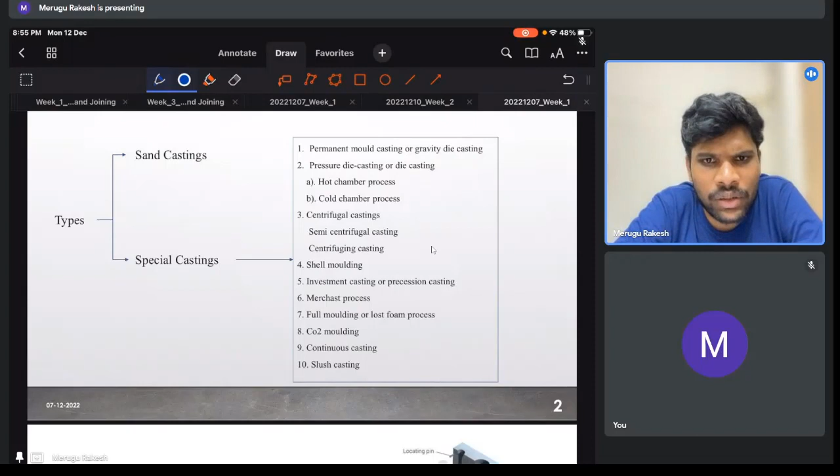Now let us discuss the different types of special castings. I have listed a number of special castings: permanent mold casting or gravity die casting, pressure die casting, centrifugal casting, shell molding, investment casting or precision casting, lost foam process or full mold process, Mercast process, CO2 molding, continuous casting, and slush casting. Let us discuss one by one.

The first one is the permanent mold casting, or the gravity die casting process. As you can see in the figure, we have molds which can be opened or closed using clamps made of metal, and you directly pour the metal, with the riser, runner, and the parting line. Once the metal is poured, we can separate the casting by removing the clamps and get the casting out, and we can repeat this process.

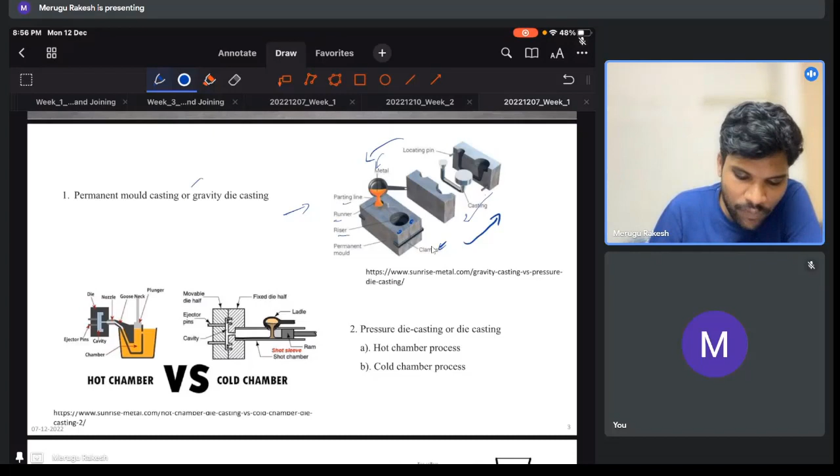This can be very fast production. This is simply gravity die casting, where we are not applying any pressure; we are directly pouring with the help of gravity.

When you come to pressure die casting, there is high pressure die casting as well, where we use a very high amount of pressure. Generally we use a plunger, and there are two types: hot and cold chamber. Generally you use a plunger or a ram to push and squeeze the metal into the cavity, as you can see here.

So these are two types: hot chamber and cold chamber. The distinction is that in hot chamber, the entire setup—the molten metal, the plunger, the nozzle, everything—is inside the hot metal. Whereas in cold chamber, we use a ladle to pour the metal into the cylinder, and we use a ram to push the liquid into the cavity.

So what's the main difference—why put it inside the hot chamber, why pour using a ladle? In hot chamber castings, the number of steps involved is very less, so the production is very fast. Whereas in cold chamber, the number of steps is increased, so the production rate compared to hot chamber is less. But there is a catch: in hot chamber, you cannot use metals with very high melting points.

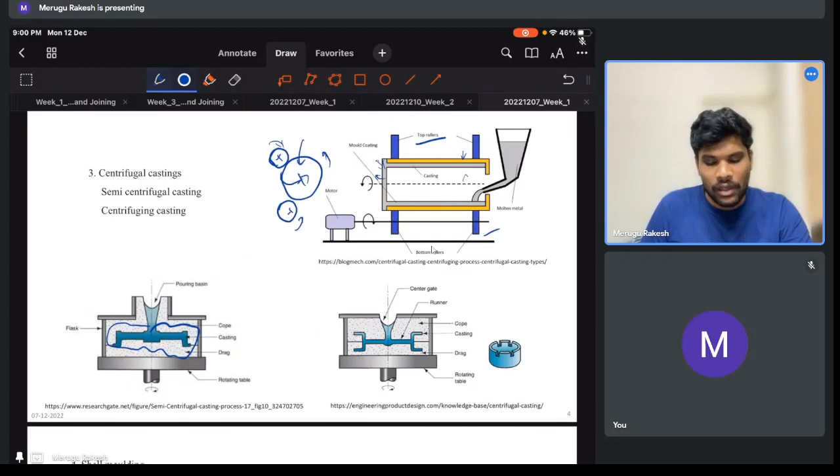Now there are some other types: semi-centrifugal casting and centrifuging casting. Both look similar, but in semi-centrifugal casting, this is the entire product we produce, say a wheel used for automotive applications. If you want to produce a wheel, you can directly make it using centrifugal casting, with just a pouring basin, a cope, a drag, and the cavity.

In centrifuging casting, we can produce several casting products at once using this setup. Here you see only two, but it can be any number. We have a central sprue and gates providing the liquid metal into the cavities. This covers centrifuging casting, one of several important types within centrifugal casting overall.

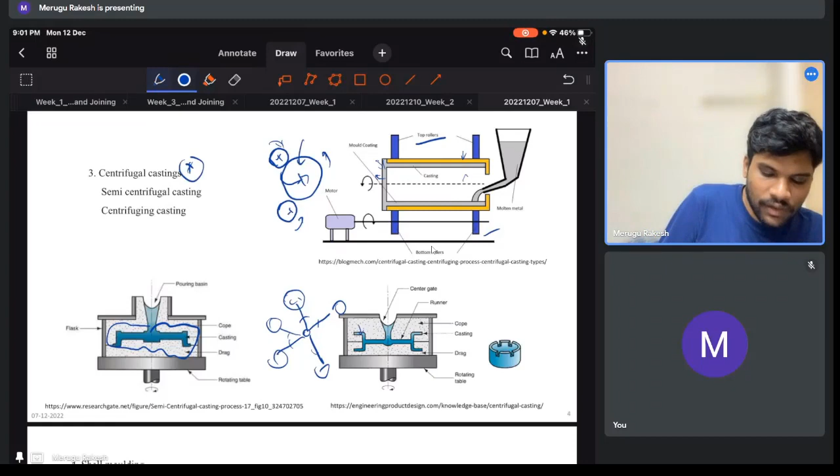Let us now discuss other types of casting. One is shell molding, where we use a shell to form the cavity. Initially we have sand mixed with some type of resin that hardens when exposed to a hot plate or similar heating.

Here we have a hot pattern where the design, the cavity, is already provided, and we invert the box. The sand in contact with the hot plate slowly hardens. When you reverse it, the thickness depends on the time and temperature parameters used. Then, using ejector pins, we eject the shell.

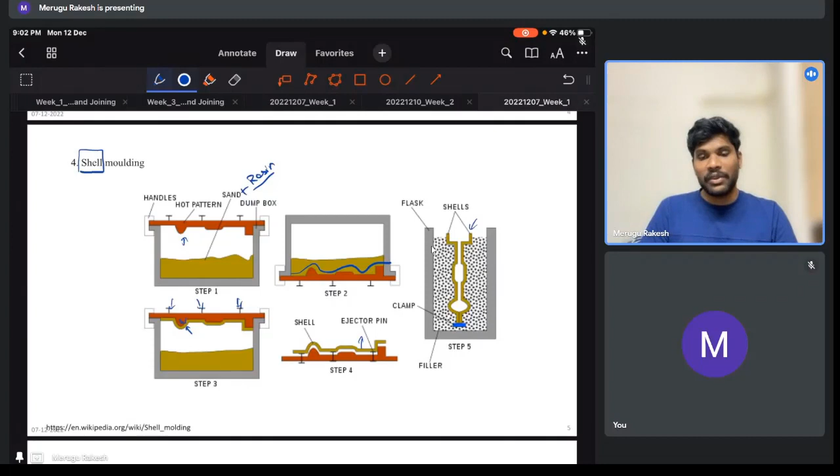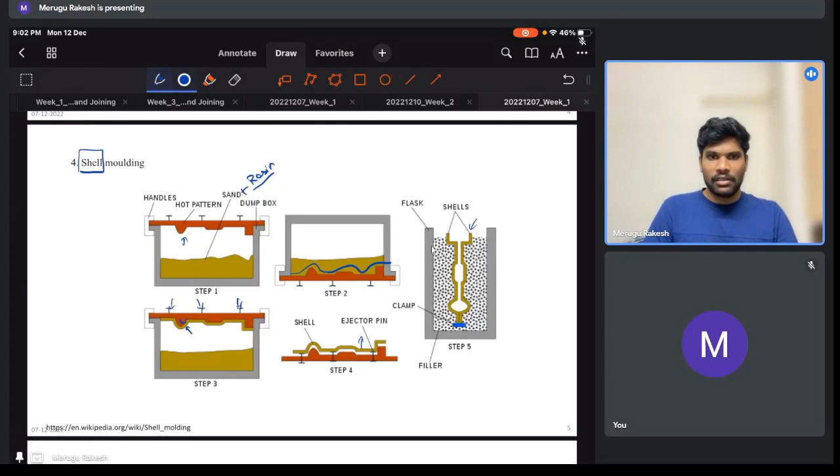When you combine the two shell halves, they form the final casting mold, and you can directly pour the metal inside. There's no need of patterning or ramming or anything else. We can directly get a product with good accuracy using a limited number of steps. After that, we take out the shells and repeat the process. This is shell molding, remember we are making the shells out of sand mixed with resin.

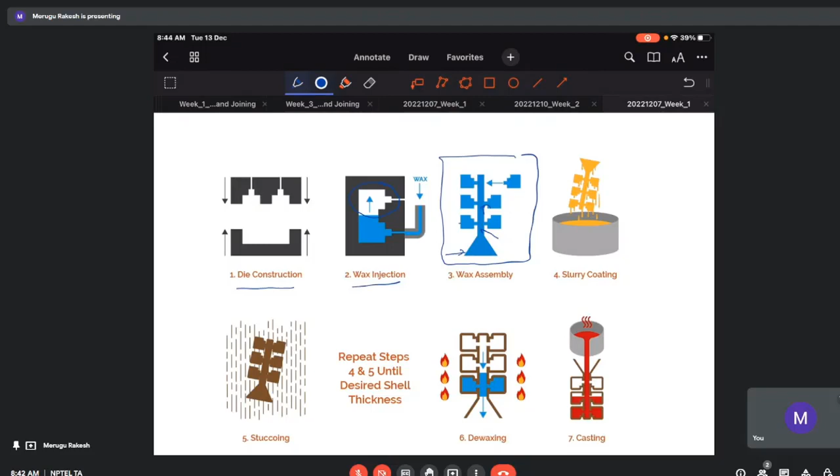Once everything is ready, we dip it in slurry coating, where it forms a thin layer of slurry. Then we repeat this stucco coating 4 to 5 times, where powder ceramic particles adhere to the slurry and form the desired thickness. As you can see in this picture, we have the desired thickness, which can hold the pressure and weight of the casting we pour in.

Before pouring the casting, we have to remove the wax inside it. It was taken into hot ovens and held for some time so that the wax is completely removed from the mold cavity.

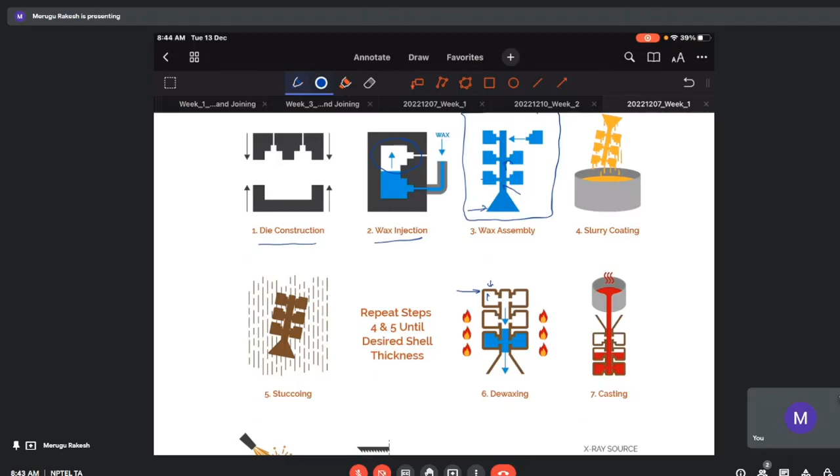Once it was dewaxed and dry enough, we pour the metal directly into the castings, followed by removal of the shell using sandblasting or jetting, then cutting the central sprue, runners and ingates. The parts are then machined and taken for inspection.

So this is the whole structure of investment casting, very important from an exam point of view. It is also called precision casting because the product we get compared to sand casting has very good dimensional accuracy. That's the reason we can get net shape products and large amounts of products at a time.

But the main disadvantage is that it has many steps to follow, as you can see the steps involved are very high. But it is also used for a lot of applications nowadays.

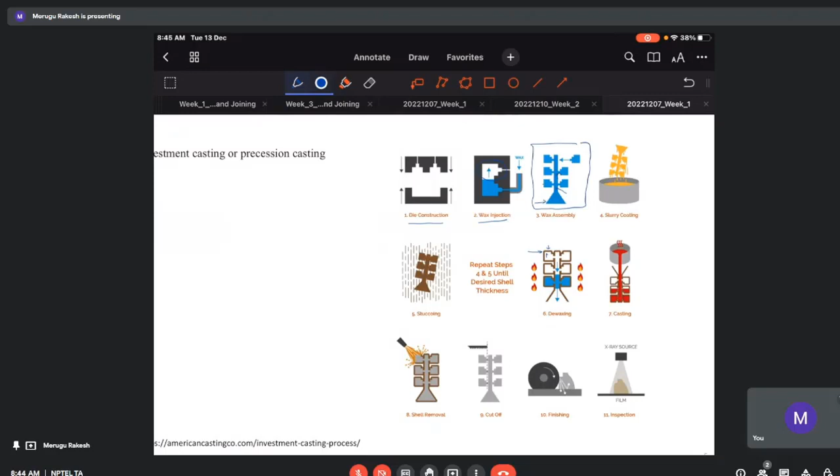Next, before going to lost foam casting, let us discuss the Mercast process. Mercast process is nothing but instead of wax, we use mercury, which gives even higher dimensional accuracy. The liquid mercury is cooled below room temperature so it becomes solid, then everything is repeated similarly, and finally it is heated up so that the mercury is removed from the pattern and mold cavity.

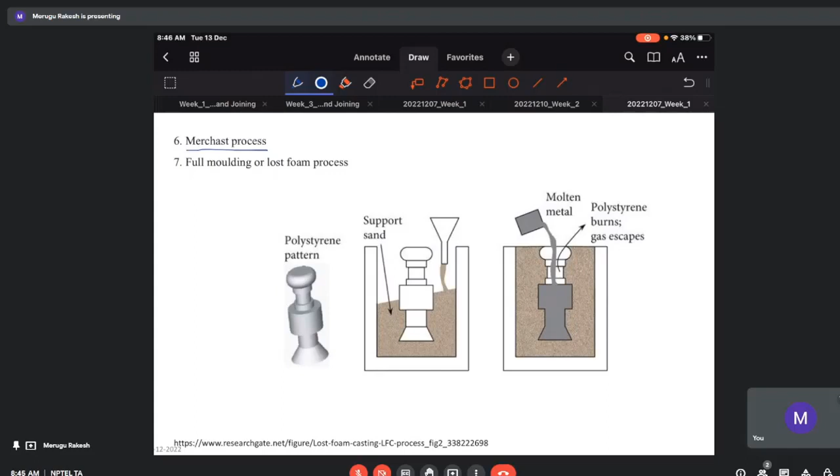Now let us discuss lost foam casting. Here the pattern itself is made of polystyrene, a plastic material, like thermocol sheets, as you can see.

Once the pattern is made into shape, it is inserted into the sand and it is filled completely. Then we will not remove the pattern. There is no requirement of two split patterns - only one pattern is used, and we do not remove it at all. We directly pour the metal inside, even with the pattern still inside. This pattern gets evaporated instantly when it comes in contact with the molten metal.

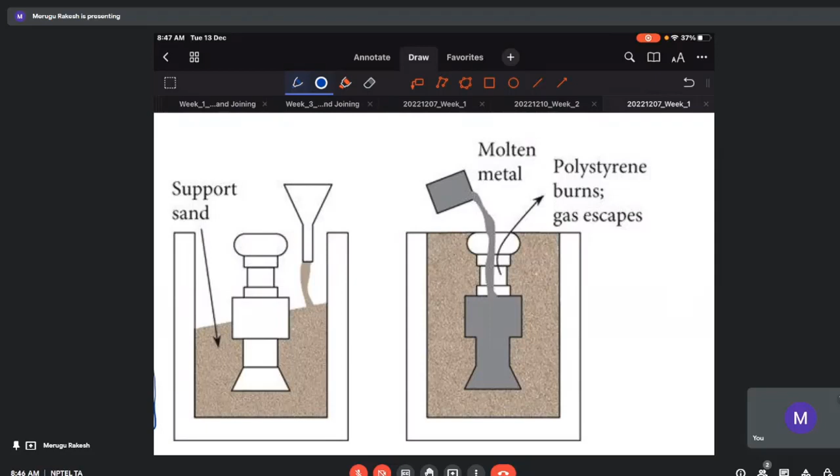Once everything is removed, this gives good quality castings with only minor defects. So this is lost foam casting, where the foam completely evaporates in this process.

Remember it. Now coming to the final three stages of these special types of castings. CO2 molding: we have clay mixed with some chemical like sodium silicate, and when CO2 gas is purged into this, it converts into silica gel, which is strong enough to bear the loads of the castings.

We have different types: using a single probe, using a multi-probe, and using a big duct kind of arrangement to make the pattern shape. This is called CO2 molding - the mold is mixed with some chemical and hardened using the CO2 gas.

If you have any doubts, it's very simple - you can easily get processing videos of these. Just have a look, it takes less than 2 minutes, and you can get a better understanding of these moldings.

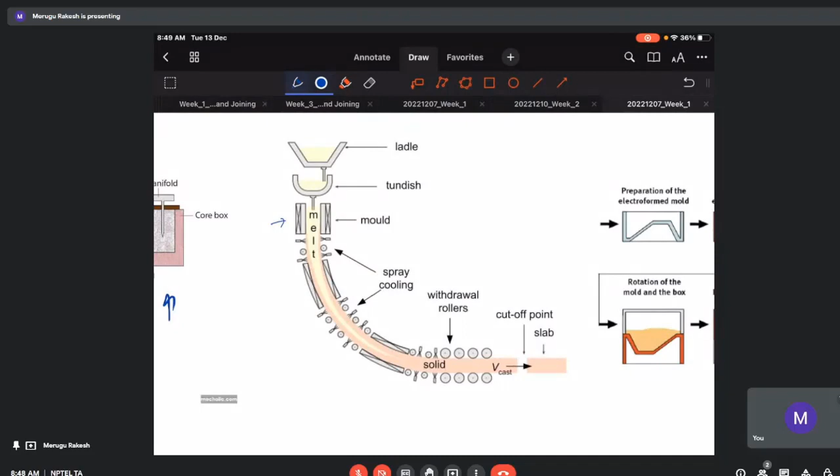During this whole entire process, the melt liquid will convert into solid. As you can see, the color difference. This is how we directly get the slabs. So this is a continuous casting used in very high processing plants.

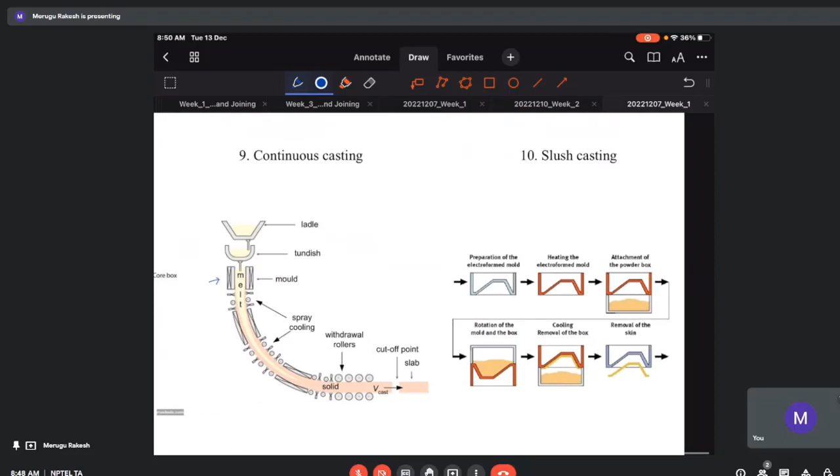So then comes the slush casting. This is more or less similar to shell molding. In this we pour the metal. Initially we have a mold which was heated, then it was added with the powder, and the rotation of the powder causes the sand in contact to get hardened, which is finally removed.

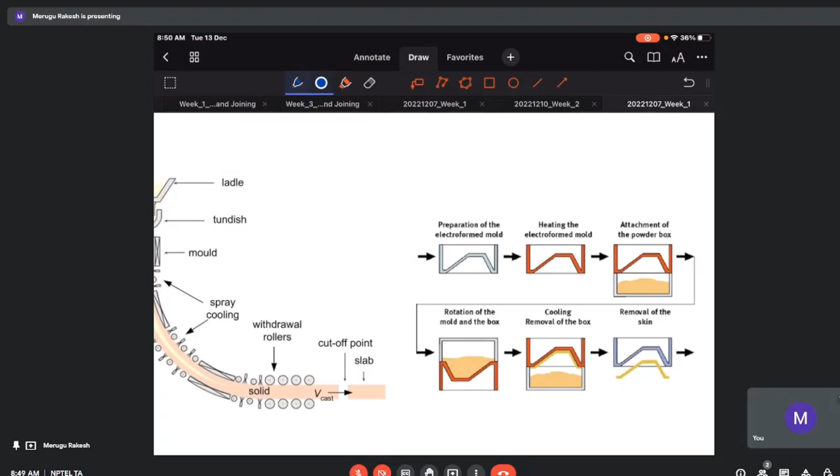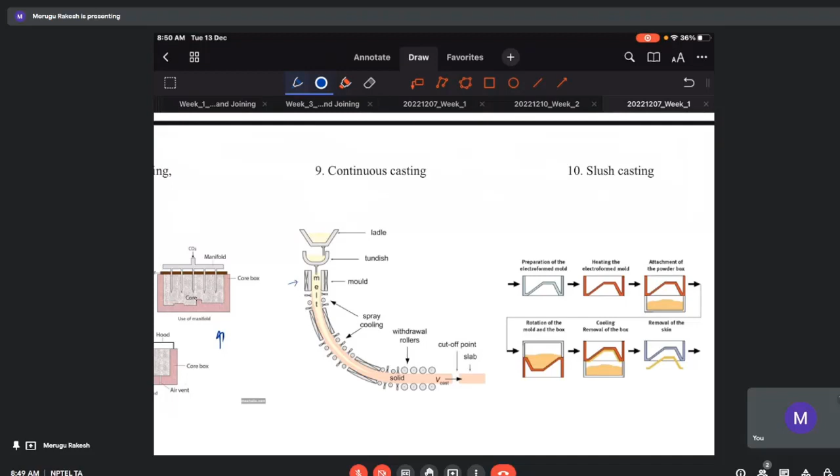Okay, this is the process of slush casting. This was used mainly for the hollow objects that we want to produce. So these are the main special types of castings that we generally use.

Remember, initially the metal is poured in a metallic die, and the die is tilted to drain off the excess metal. After the skin of the required thickness is obtained, the skin itself is the casting.

Okay, so you can assume, suppose if I want to cast, this is my mold. Then what I do, I'll pour the liquid metal. When it starts solidifying and forming some thickness, at that time I will invert this complete thing, so that when I invert it, the remaining liquid will fall off, and I will get this thickness.

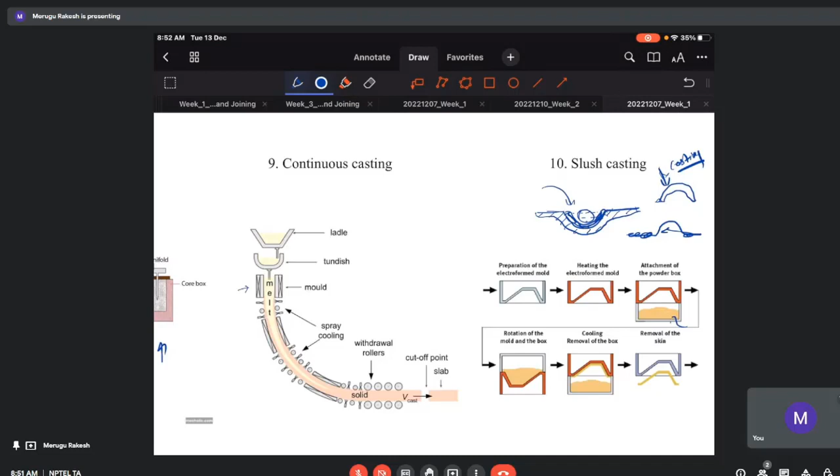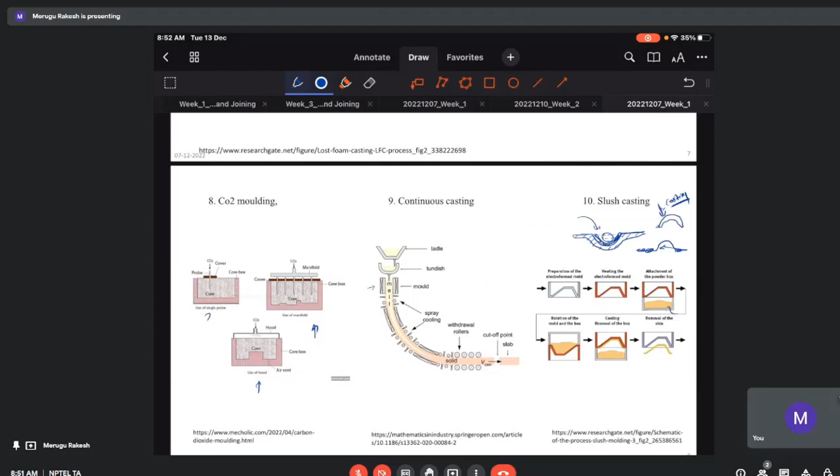As I said, in CO2 molding as well, the chemical used is sodium silicate as a binder agent. When this CO2 gas comes into contact with this thing, it will form a very hard mass, silica gel, which binds these sand grains together so that the mold is held together.

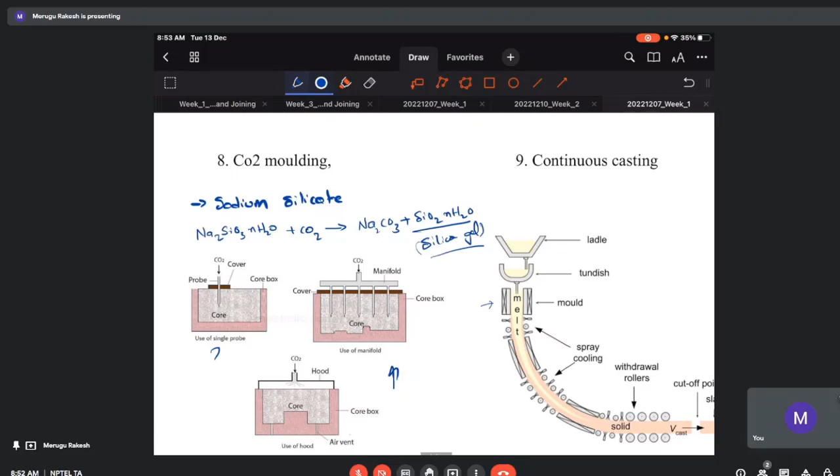So if you want to see this reaction: sodium silicate Na2SiO3, with water, when combined with CO2, we get sodium carbonate and the silica gel I'm talking about. That's the chemical, that's the whole thing about the CO2 gas.

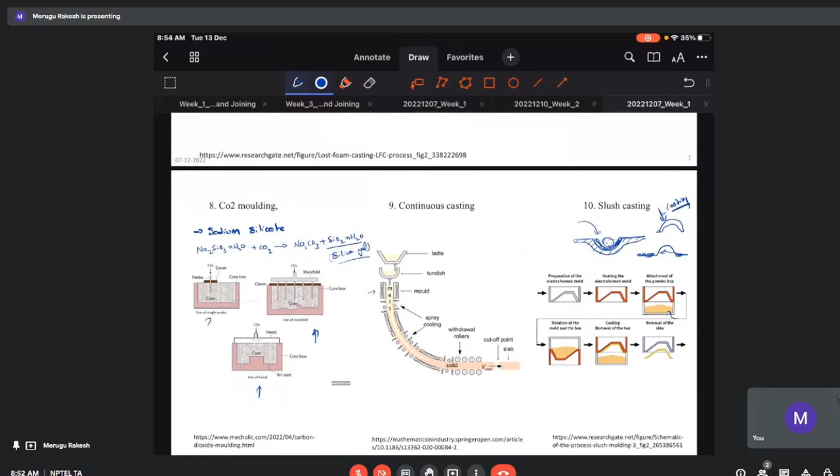This is the theory regarding different types of casting. You just have to remember the principle, simply how it works, and then you should remember the applications where we use it and why we use it. Here I discussed 10 different types of special castings generally used in these processing industries.

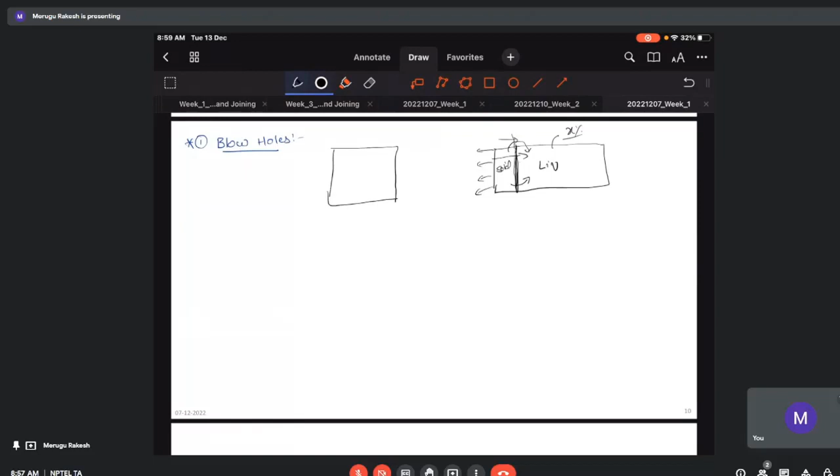Initially there will be some x% concentration in the whole liquid. When the solid front moves further, the solid will reject some gas, say hydrogen for example, into the liquid. So each time the liquid gas concentration will increase by some delta x amount.

When the solidification has moved sufficiently, this liquid will become very highly saturated with gases, so that it is able to form a gas drop, a gas bubble inside it.

If the permeability of the sand wall is good, this gas can escape easily. But if the permeability is not so good, these gases will be entrapped inside, and finally they get solidified and remain within the castings.

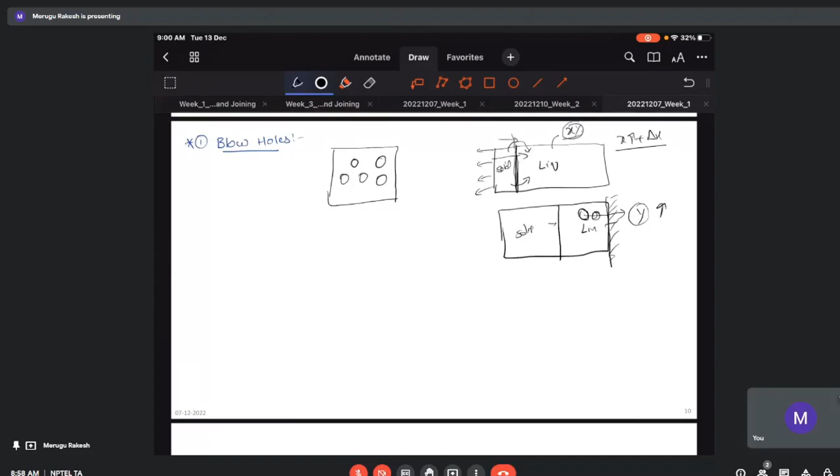That's the reason why these blowholes occur. So you have to remember the permeability of sand is also very important in this scenario.

Okay, so the second defect I want to talk about is this shrinkage cavity. This is something to do with the shrinkage of the metal when it solidifies from liquid state to solid state.

As seen earlier, this is the mold wall. So these are the mold walls where nucleation initially starts, and it gradually progresses.

The liquid at the center will still be hot, because solidification is starting from this direction and this direction. So finally the scenario will come like this.

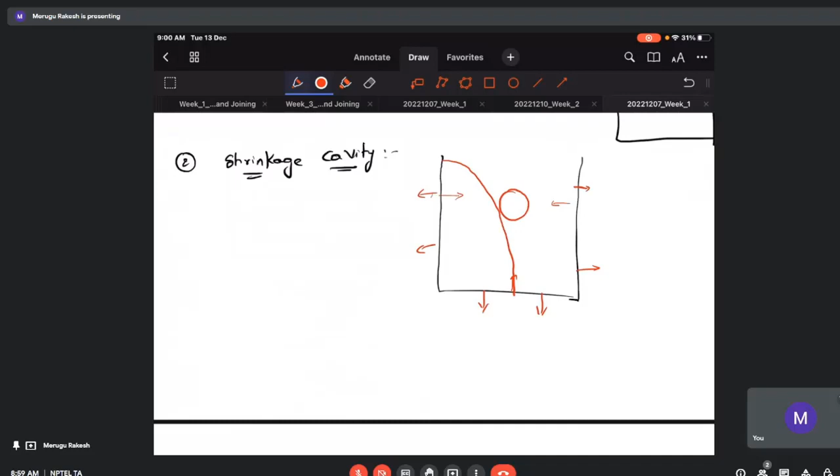Such that there is no liquid present at the center. Everything got taken away by the solidifying front, and at this position at the center we see absence of material, known as shrinkage cavities. This is the defect known as shrinkage cavity, and this can happen inside the metal also.

It is not only present at the center. It can also happen inside the casting due to the same effect.

But inside the casting, you can clearly see the distinction: gas porosity is more or less spherical, whereas shrinkage cavities are very rough, flat, rough cavities. This is due to improper gating and risering systems.

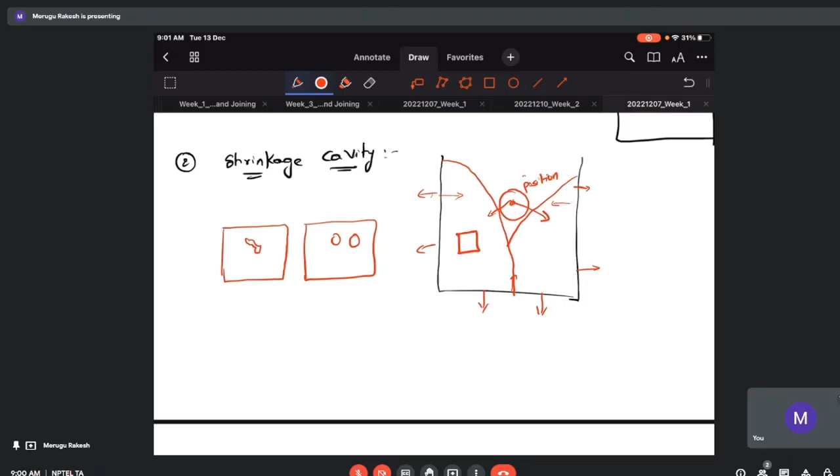You have to provide enough extra material using some riser, so that it compensates for this loss. Then we can avoid this defect very easily.

So next, let us move into the hot cracks or tears. These are smooth-edged, dull cracks formed due to the differential contraction of the casting.

Only provision of chills or modification of casting design may eliminate these cracks. So let me take a very simple structure, say an I-section.

For easy understanding, this is the casting I want, and I have a mold completely everywhere.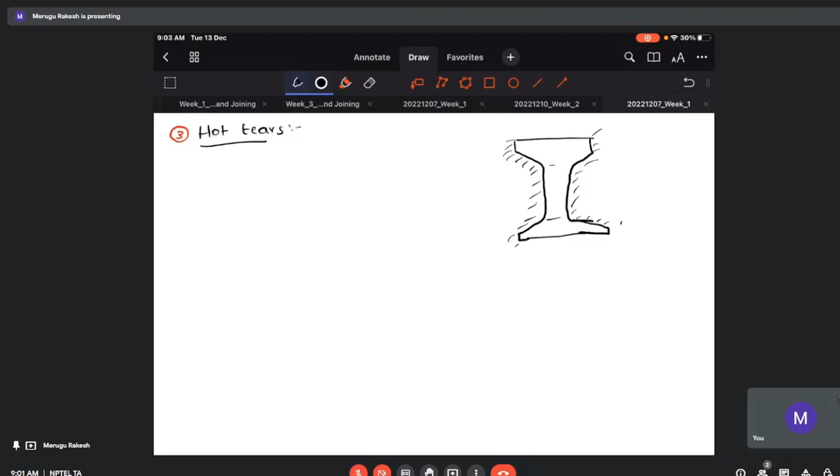Now when this is getting solidified, at this portion you see some type of stresses because this tries to pull the entire thing this side and this tries to pull the other side. Do you understand?

During cooling, the shrinkage happens from the liquid to solid transition. When this happens, we get residual stresses inside this component, which results in crack formation here or here, anywhere. This is supposed to happen in solid blocks as well.

If there is very small... the residual stresses in bulk you cannot exactly see this phenomenon, but at the micro level you can easily see even a small amount of force is enough to initiate the crack during the liquid stage.

Okay, this is all about the hot tears. So why this is happening is that...

One is the casting design you have to keep in mind. If you can provide chills, the solidification changes and the direction of solidification changes.

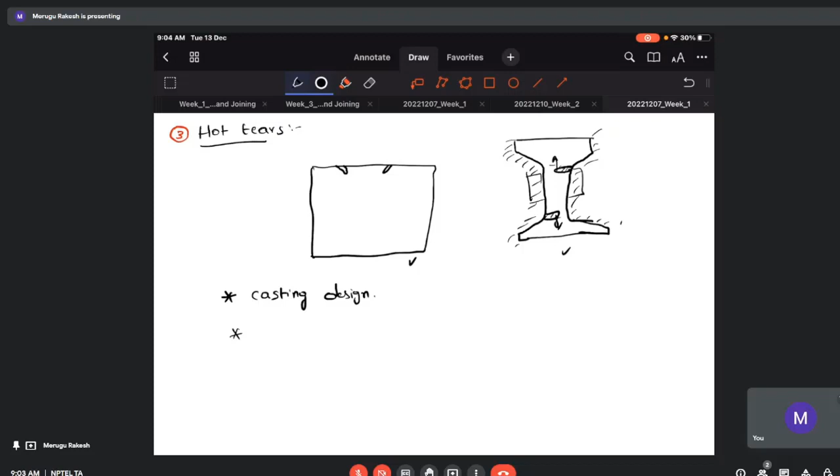One is the casting design, the other is low melting point phases, such as iron sulfide in steel, and hardening elements such as magnesium in steel, which increase the tendency of hot cracking. Since they solidify initially and increase the hardness, the flexibility is not so good in that casting, and it finally results in hot cracking.

So this support we can easily call as unyielding supports. And if you have a long range of freezing...

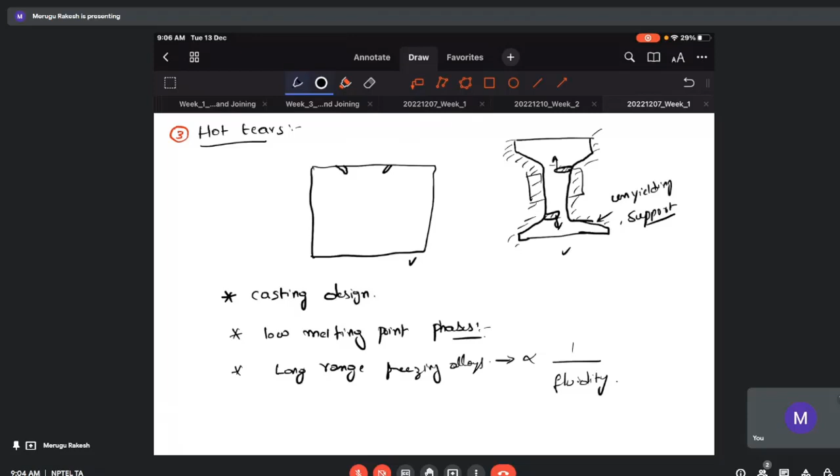Also, one more reason is where the fluidity is less. This is also one of the reasons for this type of defect, and this fluidity will also come up in some other defect that I will explain.

So the next one is the misrun.

As you've seen earlier, there was a casting like this with a step, and the filling stopped till here. So there is an incomplete filling of the casting. This defect is called misrun.

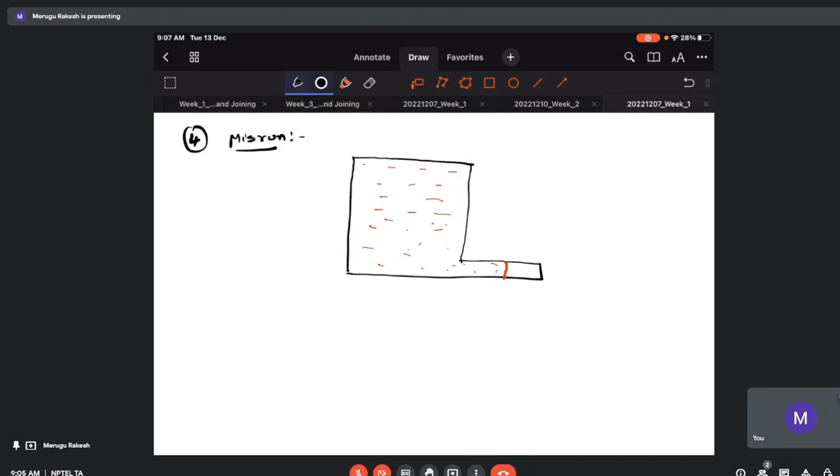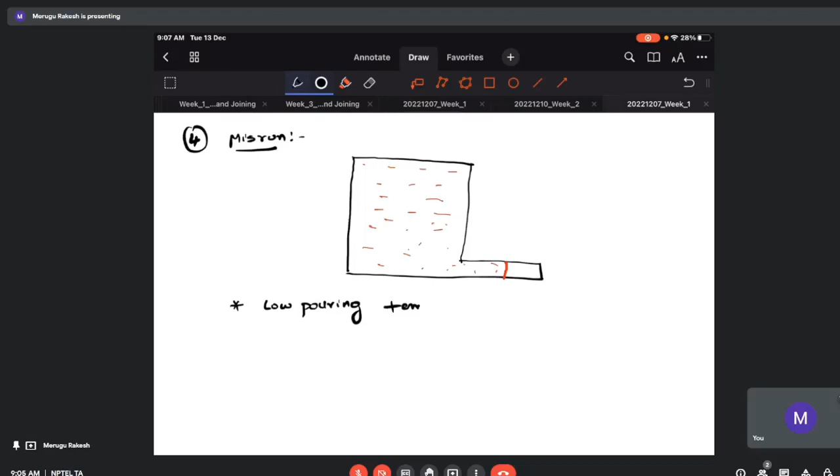So the reasons for this are low pouring temperatures, low fluidity, and low permeability of the mold. So these may be the reasons for this misrun. It was very clearly understandable, as you can see.

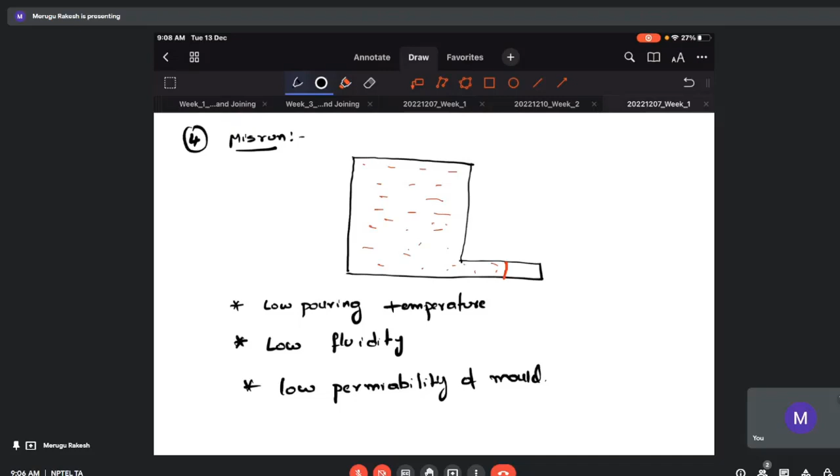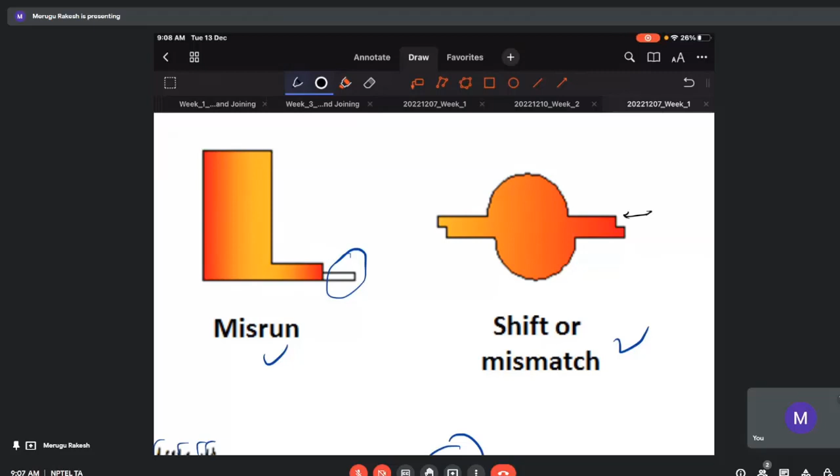There is one more defect also that you may easily confuse with misrun, that is shift. Misrun is incomplete filling, whereas shift is due to the misalignment of the cope and drag during split pattern casting. So don't get confused with these two types.

So the next type of casting defect, very important, is cold shut. You can also see the same type of defect in forming as well. This cold shut is like the incomplete fusion of two streams of liquid metal.

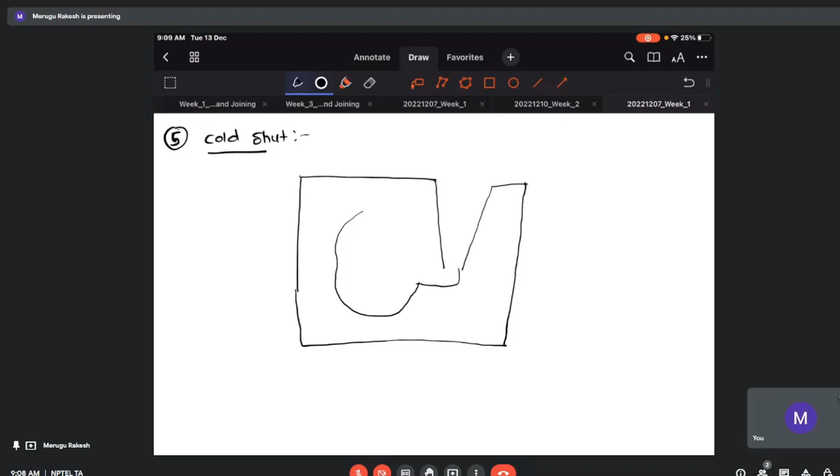Suppose this is the system, and this is the cavity I need. When you pour this hot metal into it, it will initially come like this. Then once it is at the level of this gate, it will try to fill from both sides, and we will have a junction where these two streams of metal meet and form this incomplete fusion kind of mark.

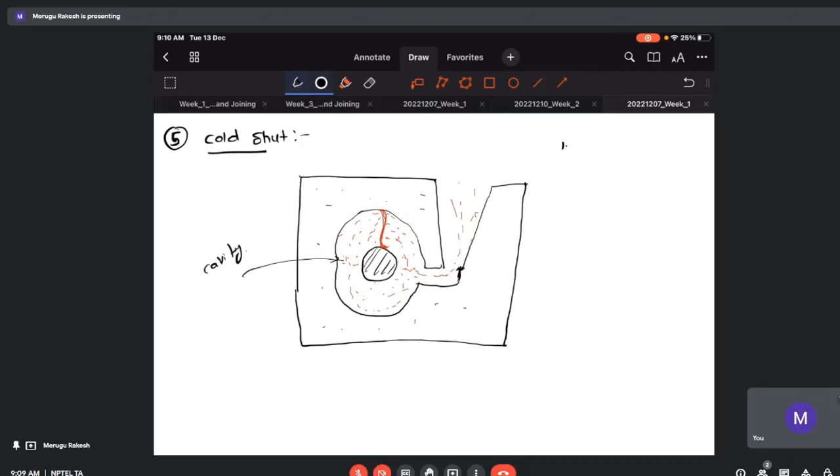This is also due to the same reasons, you can say: permeability, low pouring temperature, and low fluidity of the metal. So these are more or less similar to what we discussed just before, that is misrun, but there that casting is itself absent, whereas here everything is present. But this incomplete fusion zone we observe in this type of defect.

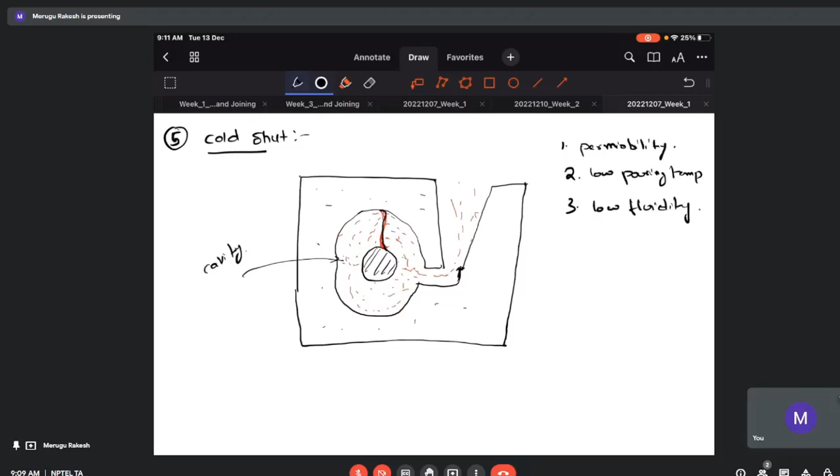Let us move to the next type of casting defect, that is buckle and rat tail. So we have a casting like this, but instead of that we got this casting with some type of protrusion of sand inside, like this, which looks like a rat tail.

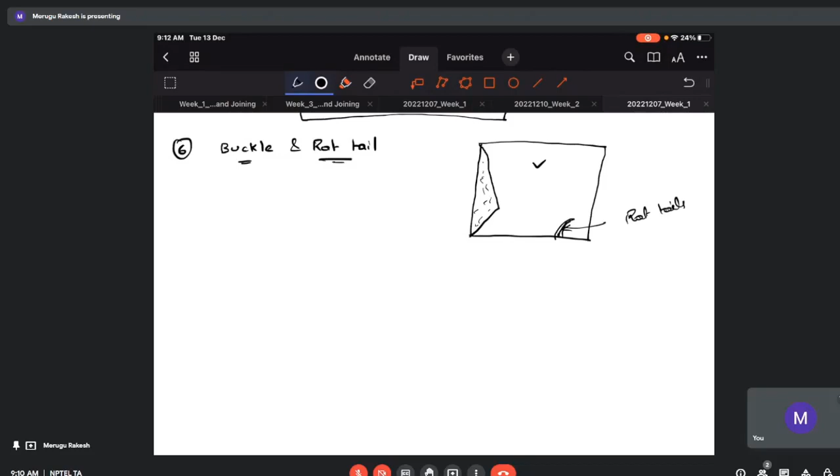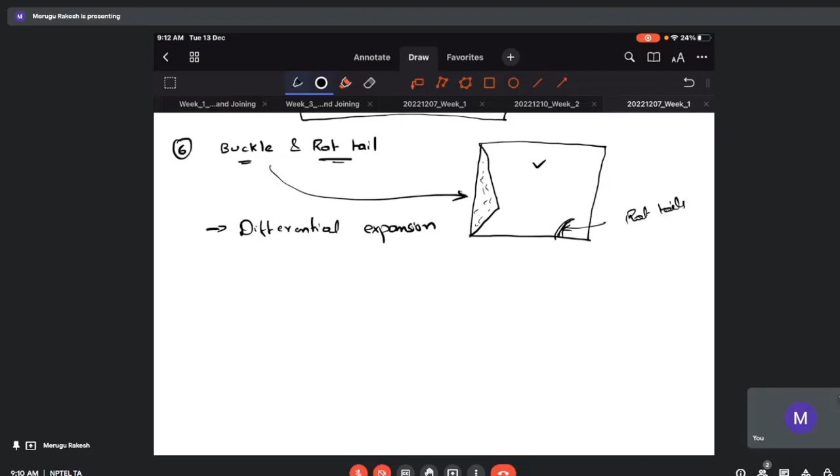This is the buckle. So these are the types of expansion defects which occur due to differential expansion of the sand grains, which results in compressive and shear type of stresses in the mold wall.

When this is in liquid state, it is very easy to deform that liquid metal, so it will get relaxed by pushing the sand into the castings, which forms a shallow conical depression, also called a buckle. So this is the buckle, which occurs due to differential expansion.

When it comes to rat tails, when the ramming during sand casting is not uniform, some small part of the sand forms a weakest region and gets pushed into the molten metal, then it forms a deep depression, which looks like a rat tail. So the reason is improper ramming, which results in loose sand, and it will be included in the sand.

So next is mold drop and scab. This generally occurs in deep castings.

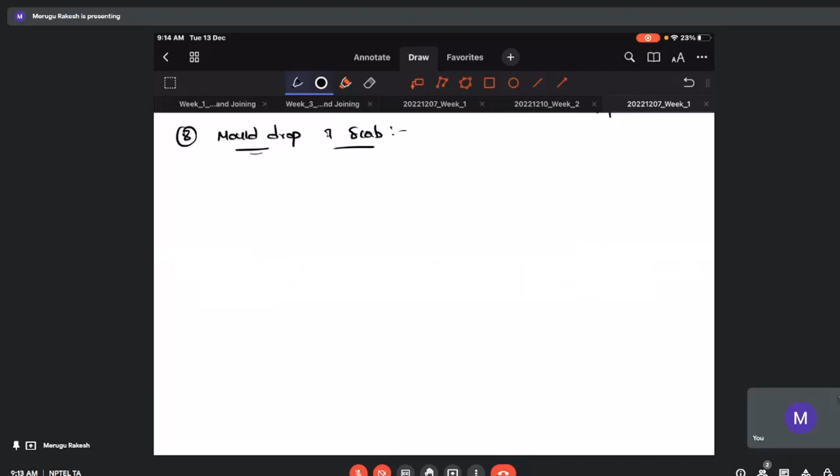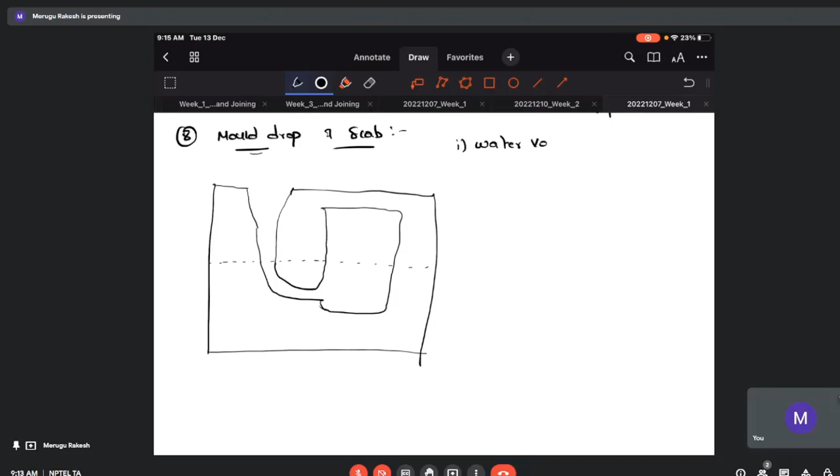Okay, this is the casting we have. So how this initially starts is, the water vapor that forms during evaporation of moisture from the mold will move up to the top of the casting, and it will get condensed, meaning it will form water droplets, and it will loosen part of the mold wall.

When this mold wall is weakened and there is differential expansion of the sand, it induces some compression and shear forces. Under these conditions, we can really get a crack in the mold wall, and due to the crack, and the addition of self weight...

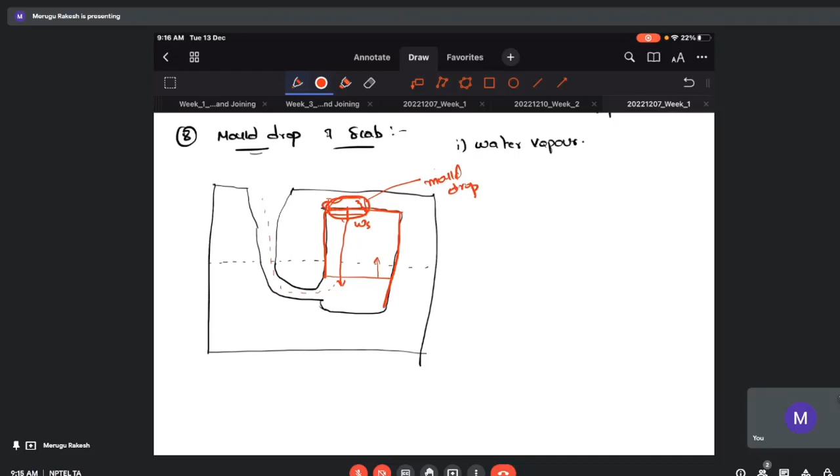Due to its own self weight, at the time when filling is happening in this direction, the sand mold will directly fall into this liquid which is moving upwards. This is known as mold drop. By the time the metal moves up to the top of the casting, this mold gets sandwiched between the top and the liquid. This is the big chunk of mold metal wall that is inside the casting, sandwiched between these two sides of the casting.

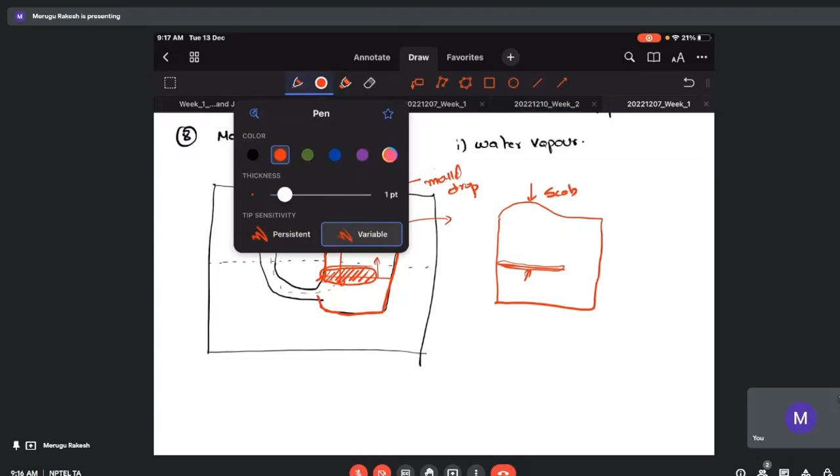This liquid metal will move into the casting, so the final casting looks like this, and also we have this mold present inside. This is called the mold drop that we see. This scenario occurs due to water vapor presence, followed by crack initiation, then the drop inside the liquid that creates a shallow cavity, which results in the defect scab. This is the process through which this scab or mold drop happens.

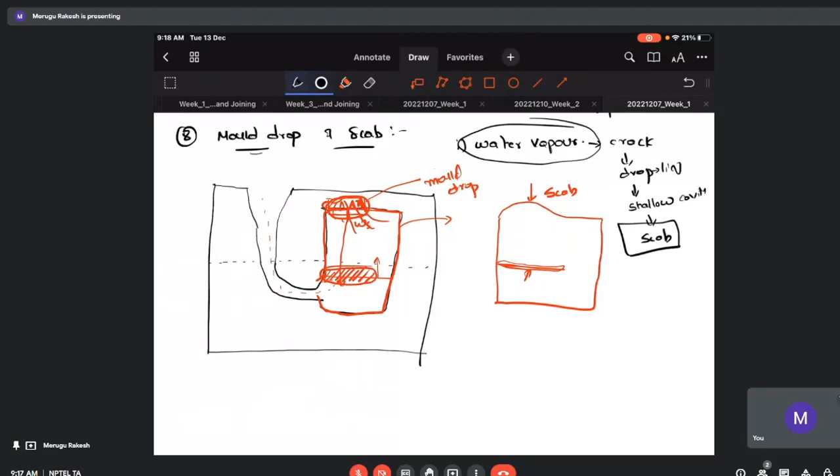So the main culprit here is the water vapor. Next, let us move to the next type of defect.

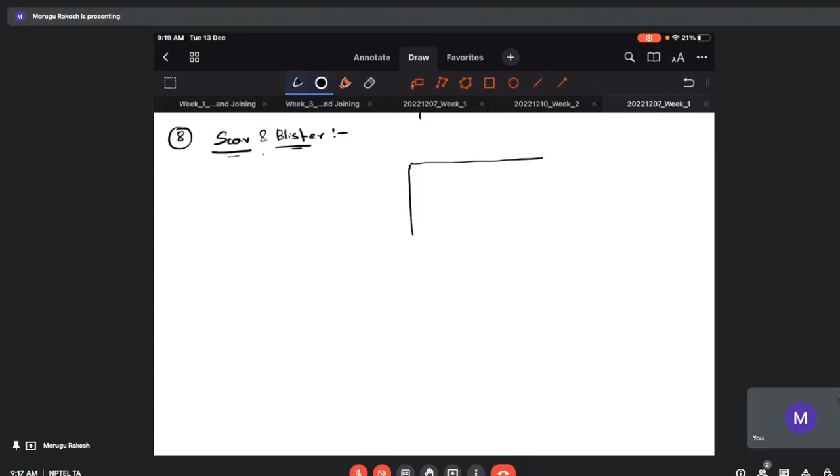That is scar, blister. These are due to the mold metal interactions where the permeability is low and the moisture is excess, such that the instantaneous formation of water vapor exerts pressure on the liquid metal. This is also due to the same reason, but we will not get that much big scabs. Instead, we'll get this type of defects.

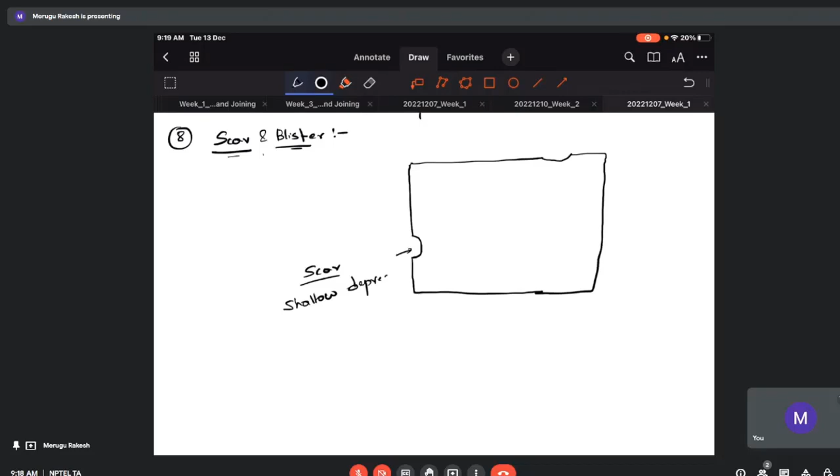A scar is a shallow depression, whereas if it is a little deeper, we call it a blister. The reason being excess water vapor. This water vapor exerts pressure on the casting that is being formed, and it forms this type of depression. If it is a little deeper, we call it a blister; if it is shallow, we call it a scar.

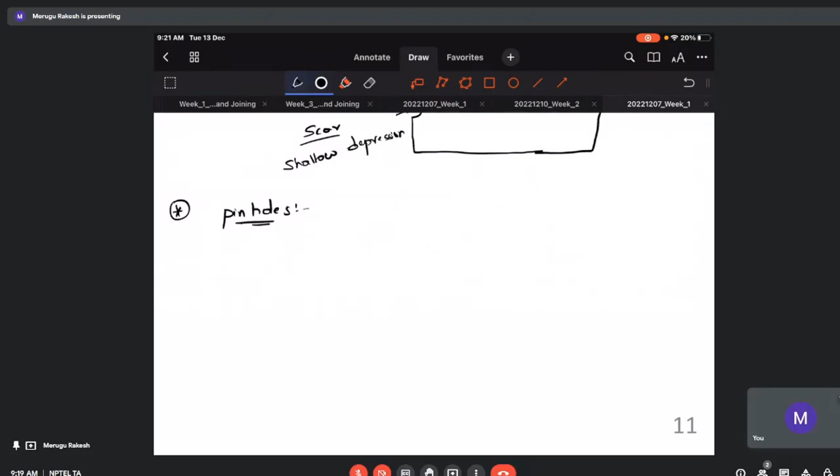Let us come to the final type, the pinhole. These are a group of small, narrow deep holes formed within a small proximity, mainly due to the hydrogen gas. The reason is similar. One thing is the permeability of the mold where there is no provision for the gas to escape. The other thing is gas entrapment inside the casting.

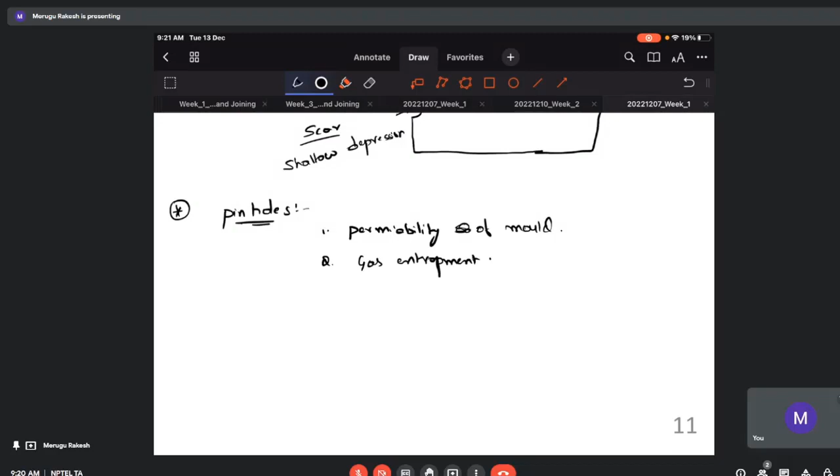These are the different types of castings and casting defects discussed in this class, more or less. One more thing is slag inclusion, which I missed. This is more or less similar - if there is improper ramming, or if there is any loose sand, this sand will get mixed with the molten metal and forms these inclusions. This may be due to the sand, or during the processing itself there will be formation of slag.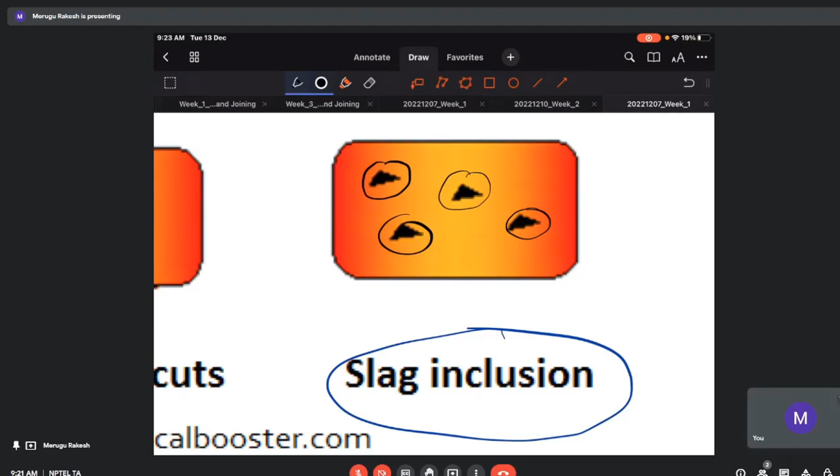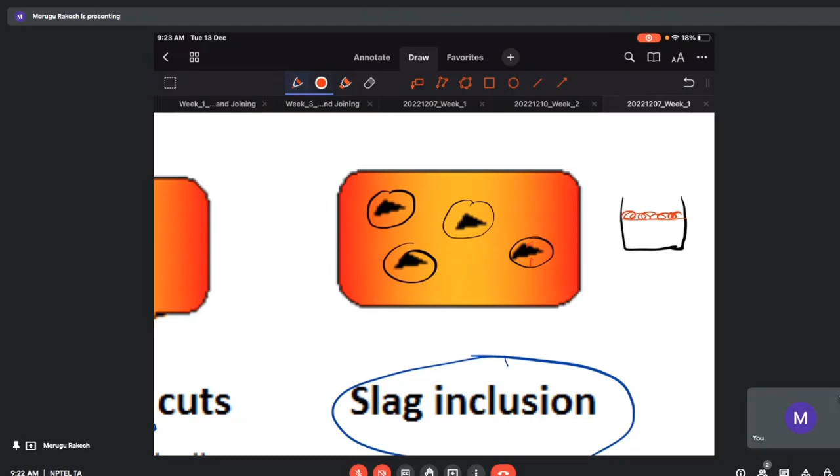In the production itself, suppose the liquid metal - there will be slag formation on the top. You have to remove the slag before pouring the metal, otherwise it will induce this type of defect. Either due to slag or inclusions, the sand also gets mixed with the mold and the liquid metal. So one thing generally seen in regular practice is that they make an entrance exit here instead of making it here, so that when the tundish is tilted, the slag will remain here only, and the liquid metal will enter from this part, so the slag gets entrapped in the top layer only - unless it is easily cleanable. Otherwise, we can make a provision like this to avoid slag inclusions.

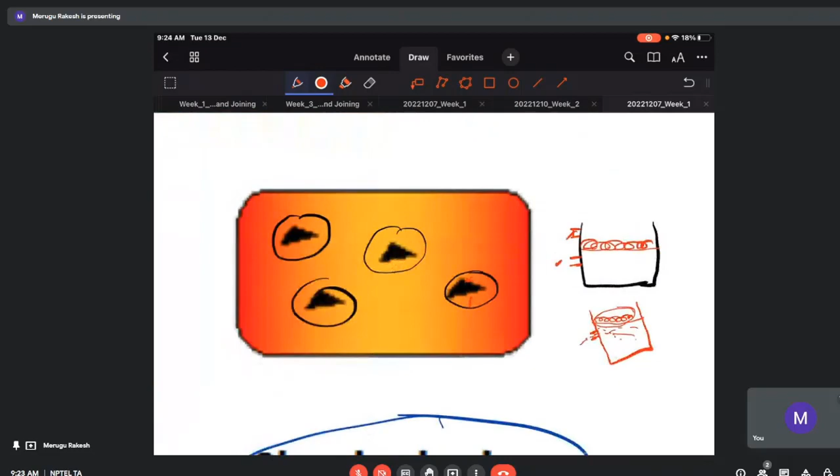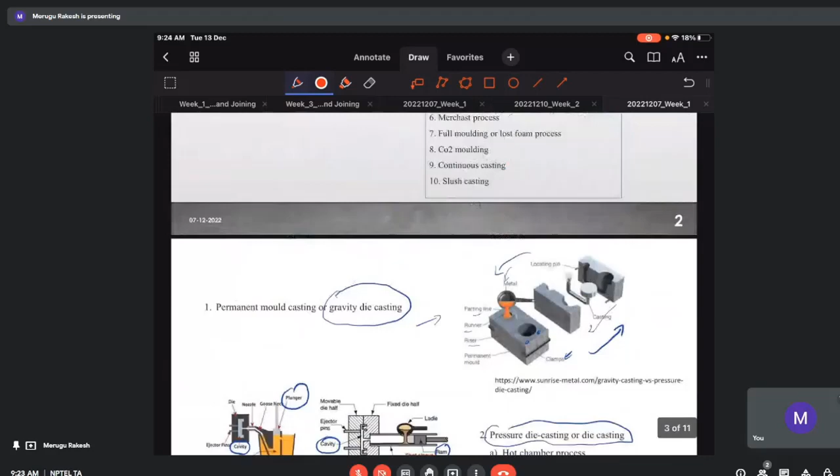So these are the different types of casting defects that are very important from the exam point of view, and these are the different types of casting defects that are generally discussed in this foundry technology course.

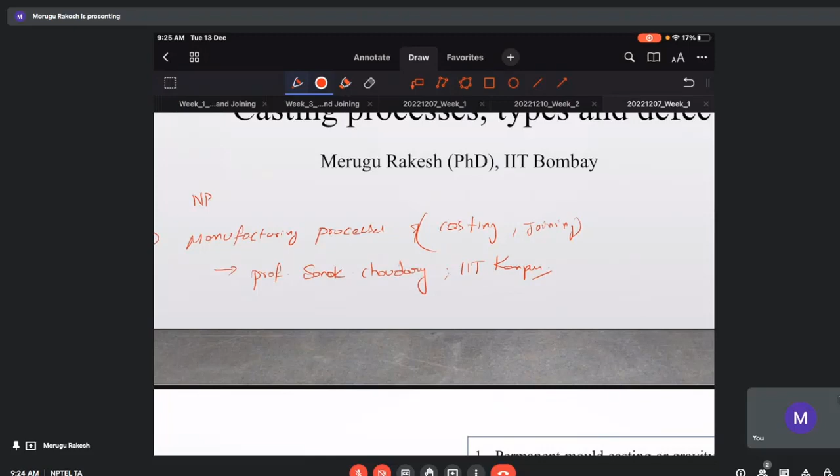If you want to get more insight into casting types and defects, there is one course in NPTEL on manufacturing processes, including casting, such as casting and joining, from IIT Kanpur if I'm not wrong. These are the NPTEL lectures, you can have a look to get more information about these types of things.

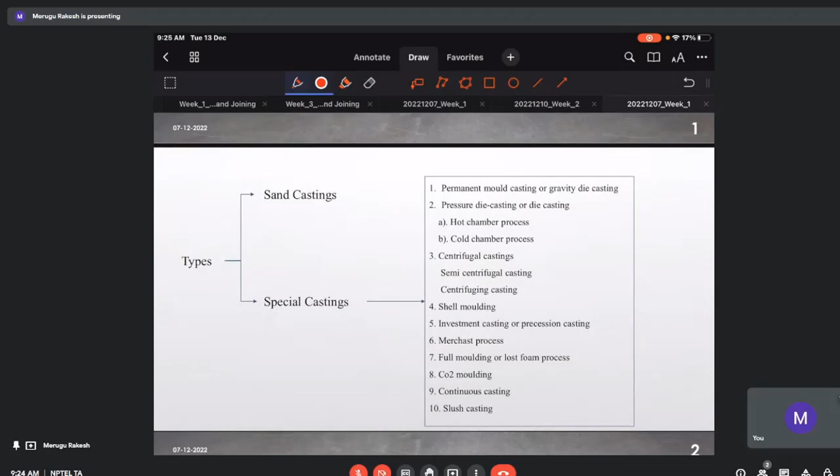The first question is about the die casting process. Option: the mold material is sand and the molten metal is poured by pressure. Option: the mold material is metal and the molten metal is poured by pressure. Option: the mold material is metal and the molten metal is poured by gravity. Option: the mold material is sand and the molten metal is poured by gravity. Die casting is completely made of metal, so you can strictly rule out the sand options.

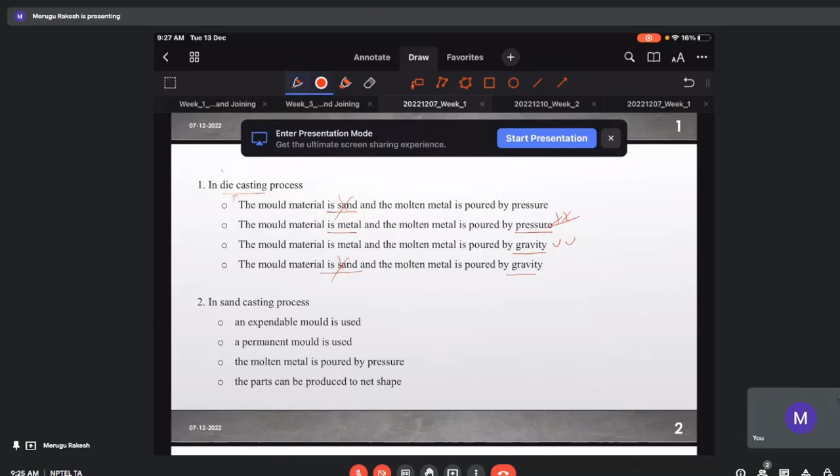When it comes to gravity and pressure, he did not mention which type of casting. There is pressure die casting or simply gravity die casting. If nothing is mentioned, we can go for gravity instead of pressure. That's the call you have to take. Both options are correct, but if you are using pressure you have to mention pressure die casting. Otherwise, you can directly mention the casting process where gravity is used for filling the mold.

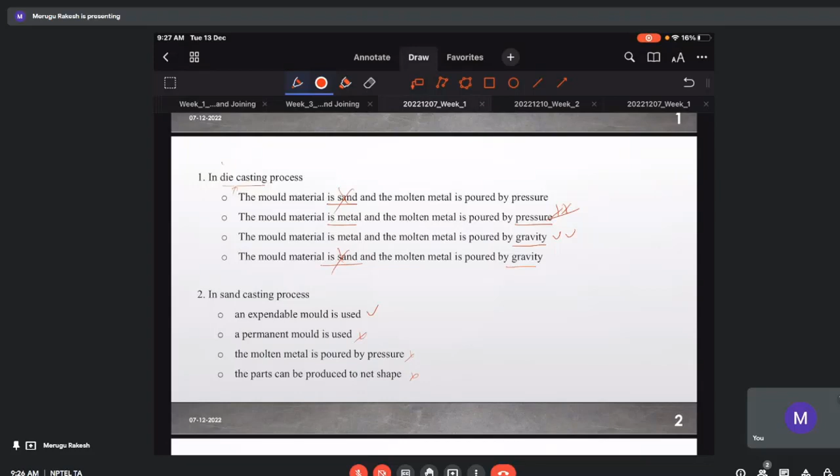Next question, in sand castings: generally in sand, an expendable mold is used - correct. A permanent mold is used - wrong. The molten metal is poured with pressure - no. The parts can be produced to net shape - no. In sand casting, it is difficult to produce parts to the net shape which can be directly used in application without any further processing.

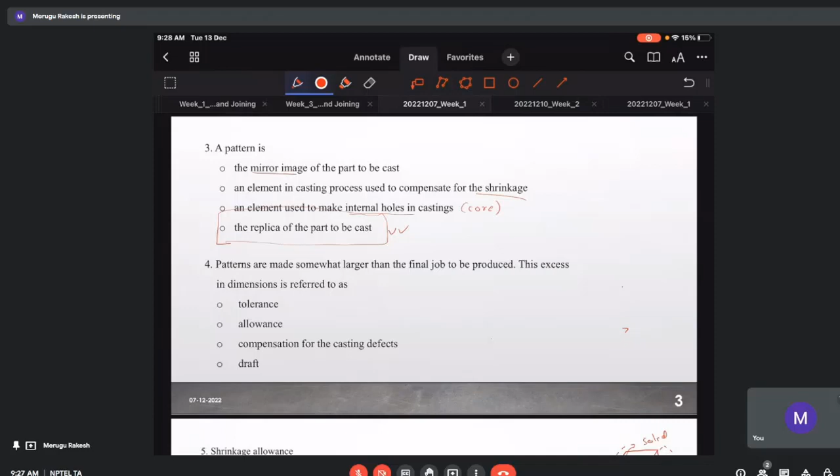Say a pattern - what is a pattern? The mirror image of the part to be used seems to be correct, but there is some logic missing. An element in casting used to compensate for shrinkage - but what shrinkage is not mentioned. An element used to make internal holes in casting is wrong, that is core. Generally used the replica of the part to be cast - this is the most correct answer. It's not the mirror image, it's the physical part.

When it comes to shrinkage, we generally have liquid shrinkage and solid shrinkage during solidification. Only during liquid shrinkage can we use a riser, whereas for solid shrinkage we have to use a pattern. He did not mention which type of shrinkage is being used, but that is not the main goal of using a pattern. The main goal of using a pattern is to get the casting product, and these are additions to the pattern for compensation for shrinkage, machining elements, and all of these things.

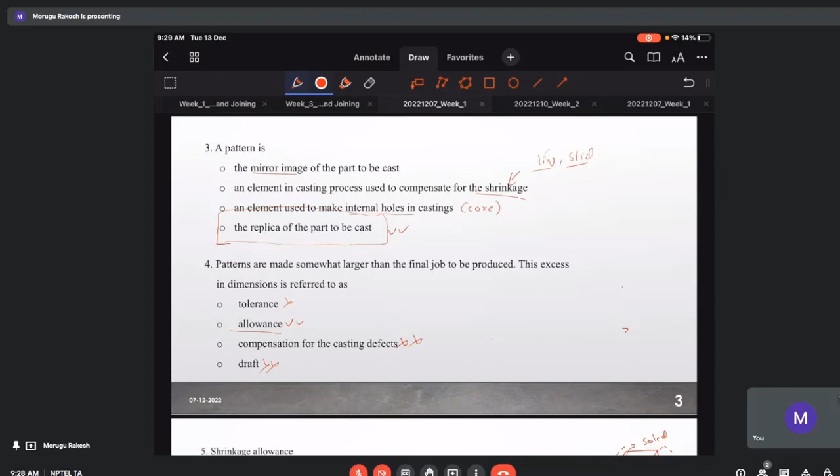The next question: patterns are made somewhat larger than the final job to produce this - called an allowance. We generally use the term allowance instead of tolerance for this type of thing. Compensation for casting defects is wrong, and draft is not the correct option for this. I'll discuss what is draft.

Let me remove this. This question talks about the shrinkage allowance, which is directly proportional to the linear... to answer this question you need this. If I say delta L is the shrinkage allowance, this is the formula - remember this. These are the units I have written here.

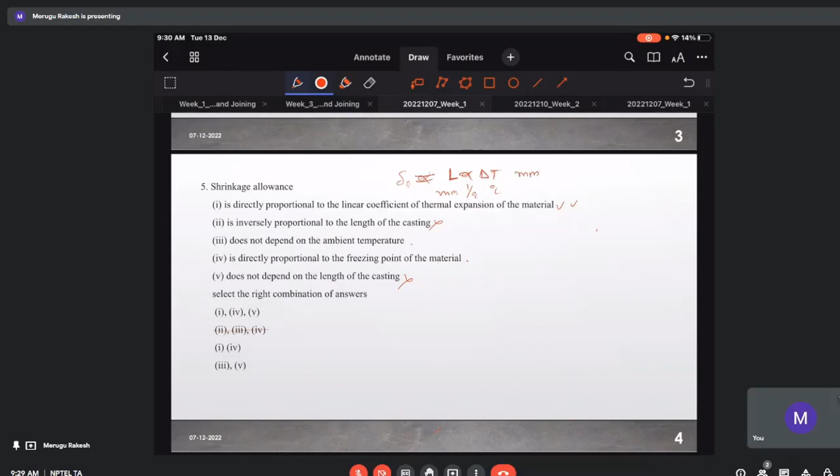Shrinkage is directly proportional to the linear coefficient of thermal expansion of the material - correct. Inversely proportional to the length of the casting - wrong. Does not depend on ambient temperature - no. Directly proportional to the freezing point of the material - no. Does not depend on the length of the casting - wrong, since it does depend. So you can remove options 2 and 5, this is gone, this is gone, this is gone - so this is the correct option.